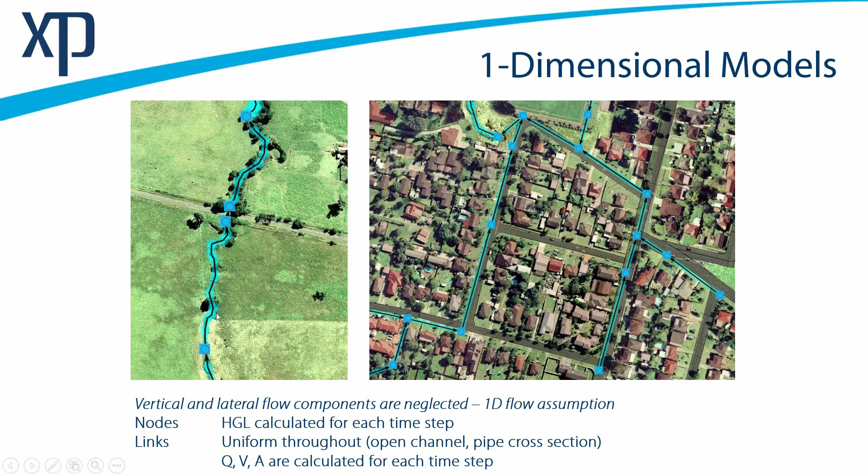And then we go and solve the equations, the continuity equations and momentum equations. And what we end up getting is a grade line at the nodes, and then we get flows, velocity, and flow area through each of the links. What are the advantages of one-dimensional modeling? They're relatively easy to build. You can model large areas, and they require low computational effort compared to 2D models. Their theory is less complicated than two-dimensional modeling. They've been around for a long time, so they're well accepted within the engineering community.

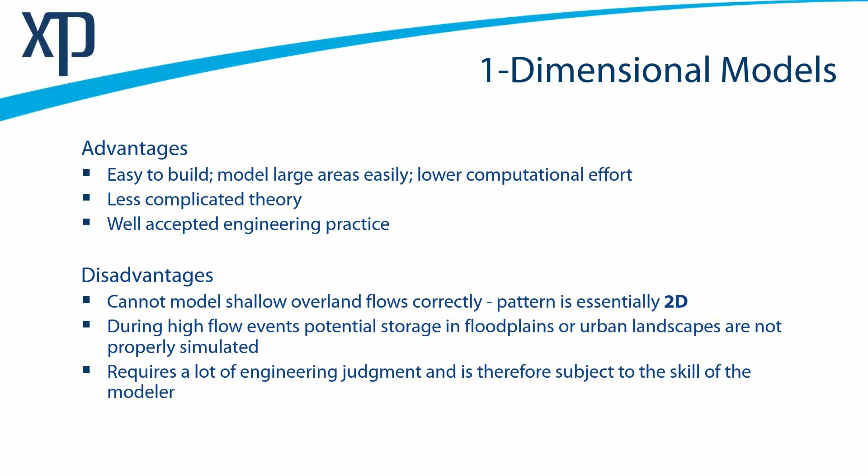The biggest disadvantage is the assumption that you can only have one-dimensional flow. Oftentimes, you have situations where flow is, let's say, overtopping the channel bank, or you have a storm drain pipeline which is surcharged, and you have overflows coming into the urban area. That cannot be properly represented within a one-dimensional model because those are essentially two-dimensional flows. So within a 1D model, if you want to get an estimate of 2D flows, you need to be aware ahead of time where flows can occur, and you need to cut cross-sections so that you can, in some ways, interpolate from the results what 2D flow regimes occur.

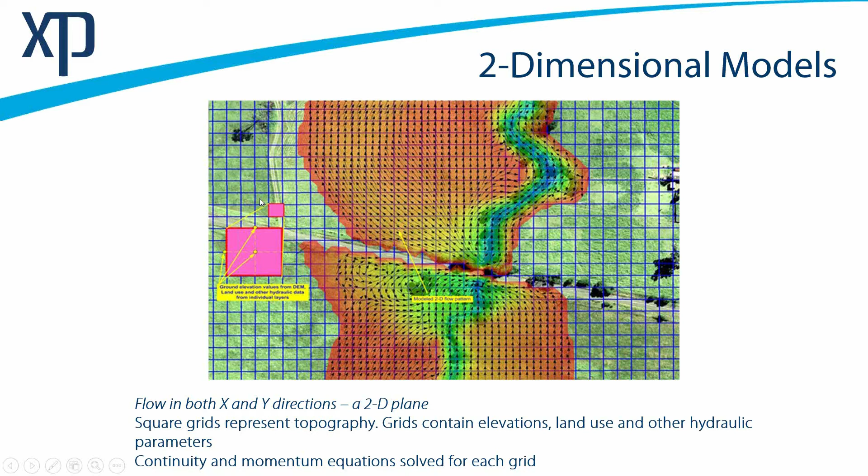So we can switch over to the other type of modeling, the two-dimensional model. In XP, we use the concept of grids, and two-dimensional modeling uses a set of uniform grids. The grids contain the information on the topography, so we have elevation information. In addition, they contain the hydraulic parameters, so we have the land use data, roughness, and any other hydraulic parameters needed to compute the two-dimensional flow. The momentum and continuity equations are solved at the grids. And what we end up getting is the water surface level at each grid, at each time point, and the flow going from each grid to adjacent grids. The advantages of two-dimensional modeling: it's relatively easy to build a model of 2D flows.

The main thing that we need is a good topo map, a surface map. A lot of the things that we want to look at when we are looking at two-dimensional flows, so flow storage effects and inundation maps, those are created directly from the two-dimensional model. Whereas in a 1D model, you only get the water surface elevation at a cross section, and you need to extrapolate to figure out what's happening for storage effects and inundation. These are done automatically in the two-dimensional models. So in some ways, you can say there's less engineering judgment required using 2D models.

But there are some disadvantages to using a 2D model. You need good, precise, and dense survey data. The quality of your survey data, basically your topo information, will dictate how accurate your two-dimensional flow results are. It requires more computational power and time than is required for a one-dimensional model. And then there are two other things that we need to look at. It becomes relatively difficult to model very large areas with a small cell size. And there's also a trade-off in the accuracy and the representation of the cell size. I'll get more to these 2 points in my next slide.

And 2D modeling is a relatively new approach. It's maybe been around the last 15, 20 years in the engineering community. So it is not as well accepted as 1D modeling. It's still, you can say, in the phase of development and being accepted by the community.

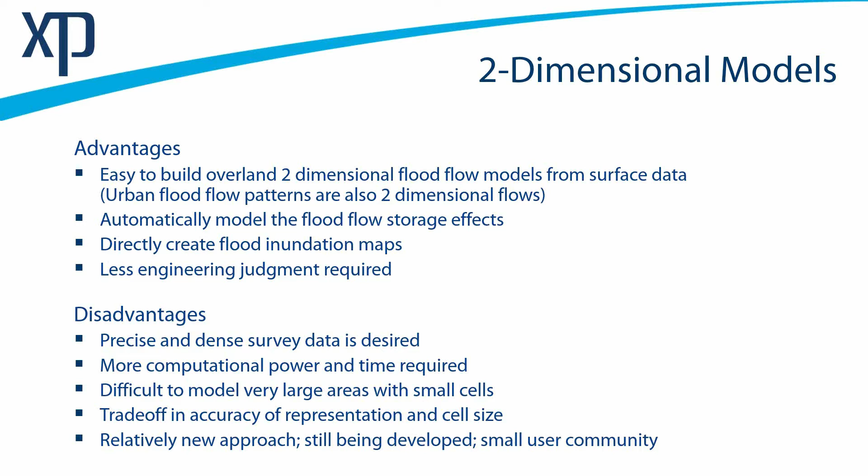So what can we do in such situations? One thing is maybe go and use a smaller grid size. The only issue is the smaller the grid size, the more the computational requirements are. So there's a big trade-off between the cell size itself and the computational requirements. Let's say if you use a grid size half of this size, the computational power goes up 8-fold. So that is one big issue in 2D modeling.

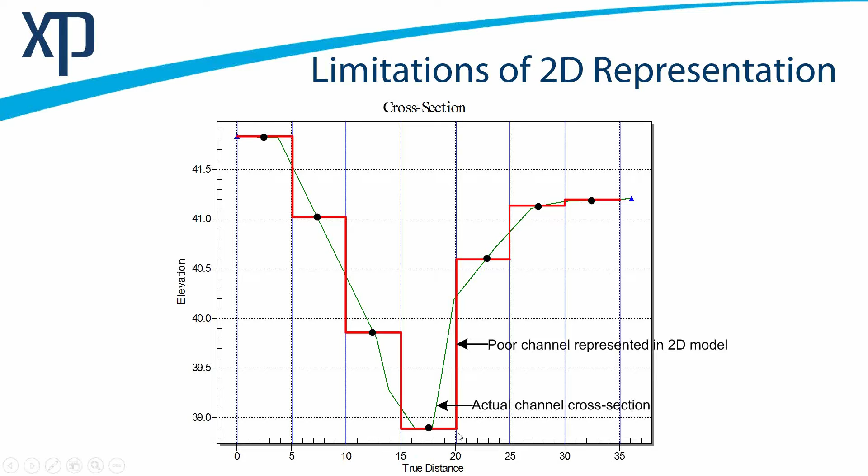So there's a whole concept. We know 1D models are good for certain applications, and 2D models are better for other applications. So if you're looking at situations where we have a combination of one-dimensional and two-dimensional flows, it makes sense to couple the models together and use each approach for the modeling it is best suited for. So we can use a 1D model to model any underground pipe flows, so storm drain systems and sewers and culverts, and any channel flow.

And then anytime we have flows overtopping the banks of the channel and going to the floodplain, use a 2D model for that particular domain. And the same thing, if the flows from the buried pipeline are reaching the surface and you have some street flooding, model that in 2D. And if you have wide watercourses, then you can model those in 2D.

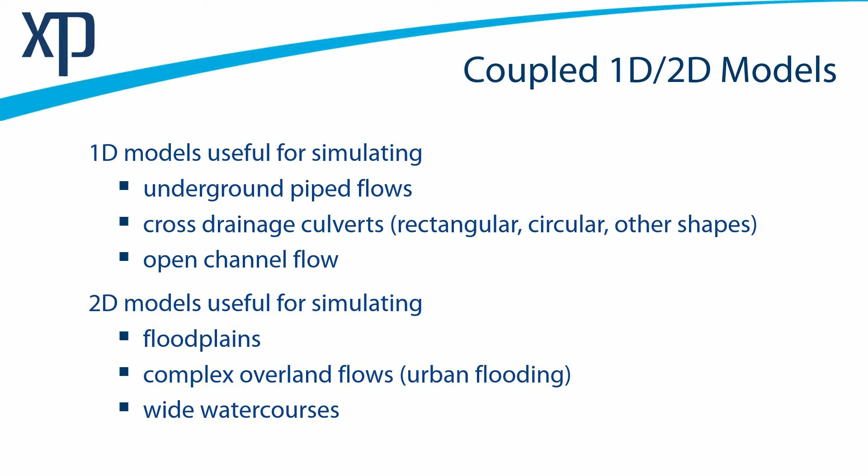Before I go on to the next slide, I think now is a good stopping point, and we'll do a quick survey to get a feel from the audience on what sort of applications they do 2D modeling for. I'll ask Nicole to take over and do the poll. Absolutely. So you can see on your screen now: what are typical applications for which you currently use or plan to use 2D modeling? The options are floodplains, urban areas, so if you have a lot of underground systems that you have to deal with, maybe coastal areas, wetlands, or dam break.

All right, I'll go ahead and close that. Can you see that, Venu? Yeah, I can see that.

So the results are basically saying 90% of the audience is using 2D modeling to look at floodplains. 80% is looking at urban areas. And then we have 30% looking at dam breaks, 20% at wetlands, and 10% at coastal areas. It works out pretty well because I'll be focusing on the two areas most of the audience is interested in. So looking at floodplains and urban areas, and how we can combine 1D and 2D modeling in both of those application areas.

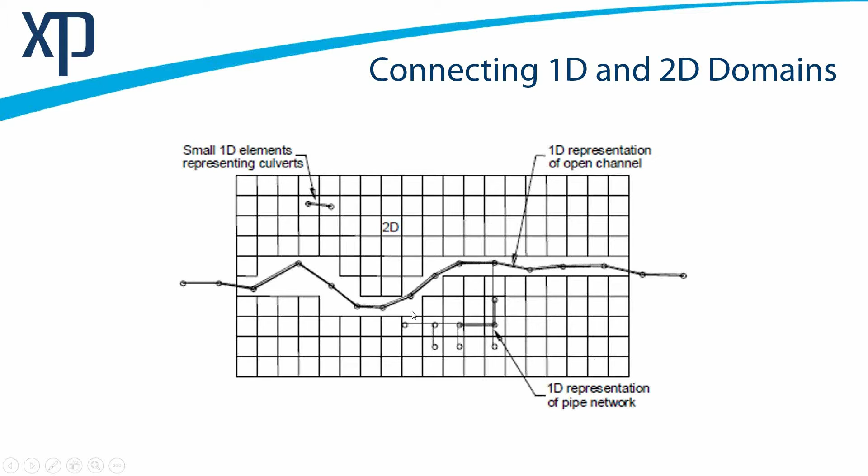For example, within a small area, we can model a culvert. So this is an isolated area itself. And then we can call this a channel or a river bed running through it. And then we do have a storm drain system. Each one is an independent 1D model embedded within the larger 2D model, and those can be connected.

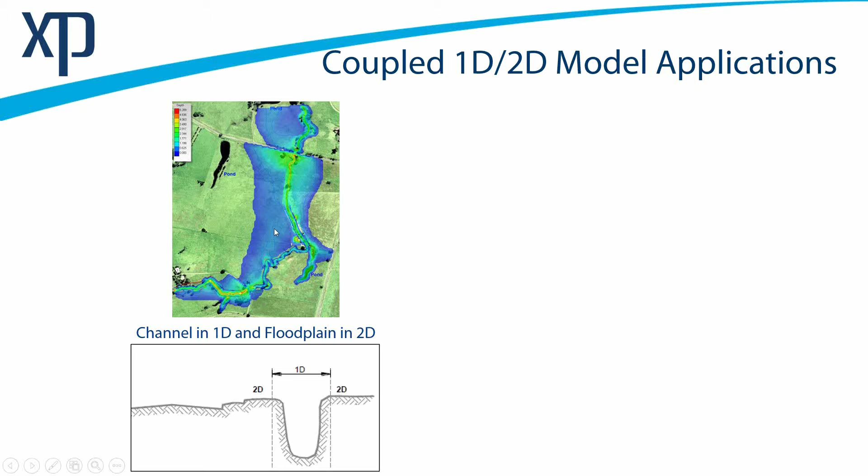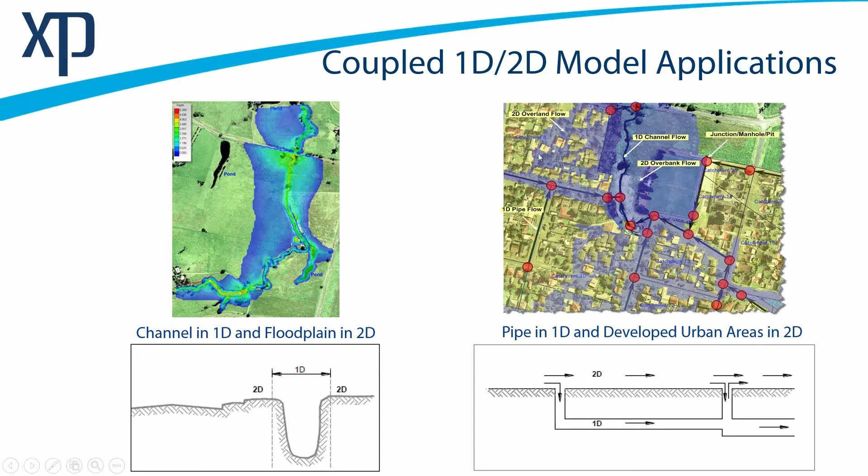If we start looking at urban applications, what we have here is a storm drain system within an urban area. As long as the flows are within the pipe itself, we can use 1D modeling. That's the most suited. So anytime the flows are within the pipe system, it's 1D. Once you start getting flows to the surface, we switch over to the 2D modeling. So surface flows will be modeled in 2D.

So I'll go ahead and jump into setup and best practices for 1D/2D modeling. 1D/2D models are fairly complex. So it's highly recommended that we develop the 1D component of the model first. It's easier to build, it's easier to debug, and once we have a working model, then we can combine both of them together. If we start working on both the 1D and 2D models simultaneously, it becomes somewhat hard to figure out where the errors are, what the boundary conditions are, what's missing. So develop the 1D model, get that working, and then combine that with the 2D model.

The next thing we need is a clear understanding of which components we want to be modeled in 1D. Where is the flow regime acting more as a 1D flow and where is it acting as a 2D flow? So within the study area, what is best suited for 1D modeling? What is best suited for 2D models? What are the linkages? Where is flow switching over from, let's say, one-dimensional flow to two-dimensional flow?

A couple of things to keep in mind. Let's say we are modeling a channel. If the channel is being modeled as 1D, we want to make sure that the extent of the channel is removed from the 2D surface. We don't want to duplicate the conveyance area and storage areas. Another example might be modeling a pond as a 1D node. We need to make sure that the footprint of the pond is removed from the 2D model. Once again, we don't want to be double counting the storage area within the pond.

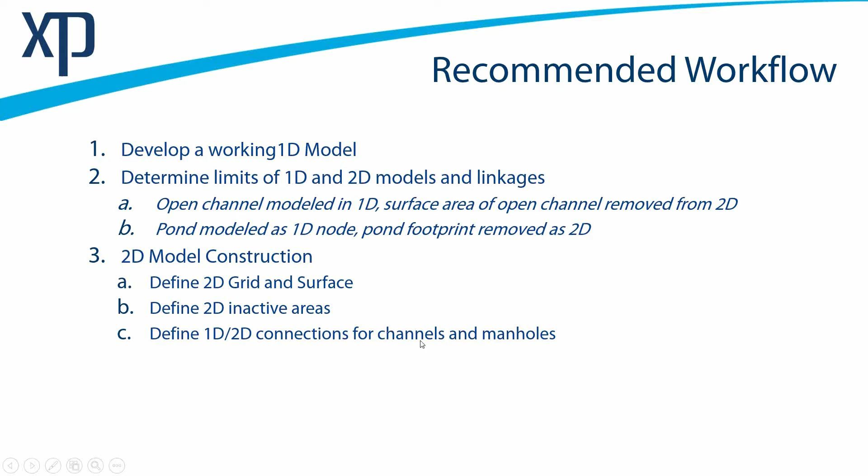And then in an urban application, when we have a storm drain system, how can we connect a manhole to a 2D system? The next thing is, this is for the 2D grids itself. We need to define the land use. In land use, primarily what we are looking at is the friction factor and any other hydraulic parameters which will define the flow equations. Define the boundary conditions for the model. Go ahead and set the job control, and then the model is ready to go.

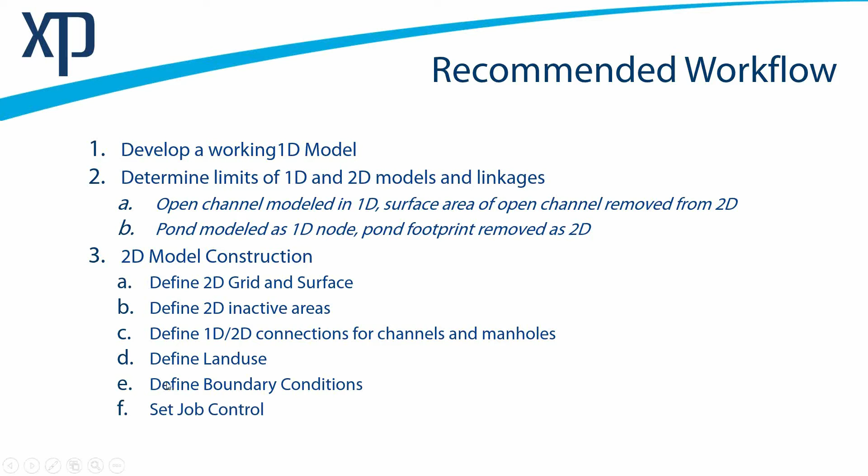So I'll be looking at two applications, and the first application is looking at how you can connect a channel defined in 1D to a 1D 2D model. There's a lot of information on the screen, and I'll just walk through them one by one. So we have modeled a river in 1D. So what we have is basically the node, then one river reach, which is shown by this link over here, and then the downstream node.

We'll be modeling flows within the river channel in 1D, and any time the flow exceeds the top of bank, then that's going to go into the 2D model. So the first thing we want to do is clearly distinguish where the flow elements are going to be within the 1D model and where they are going to be within the 2D model. In this particular area, we know where the top of bank is. So the top of bank will serve to delineate two areas. One is going to be what is inactive within the 2D areas.

So everything within the top of bank is going to be channel flow within these limits. Once you exceed the bank level, then that's going to be 2D flow. So this will delineate where the flows are switching from 1D to 2D. This becomes an inactive area in that we don't model that within the 2D, and it's also the interface between the 1D model and the 2D model.

The second thing is the 1D model is going to calculate the grade lines at the nodes themselves. That information needs to be conveyed over to the 2D model. We use the concept of a 1D 2D connection line to pass the information from the node, which is calculated in the one-dimensional model, to the two-dimensional model. So at each time step, any head which is calculated in the node will be transferred over to this.

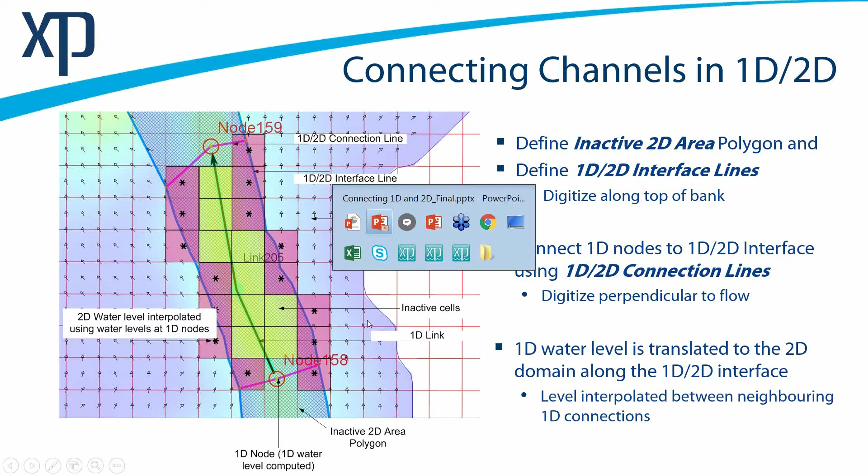So I'm within XPSWMM, and I've already built the model for the river channel itself, and it's a 1D model. So we have node and link representations. I'm looking at node 1, node 2, node 3. The river is coming in and we're crossing a road embankment, so we have a culvert running underneath the road itself. For the river itself, I defined the cross section, and that's shown by this blue line. So this is essentially a 1D model.

I'll go and turn on the grids. This 1D model is sitting on a 2D model. So this area is being modeled within the 1D model, and we don't want to duplicate that in the 2D model. So the first thing is we make this area which is being modeled in the 1D model inactive within the 2D model. To do that, we go to this icon, the 2D model.

We'll be creating a new layer, and that's going to be an inactive area within the two-dimensional model. Go ahead and give it an appropriate name; I'll just call it inactive. The inactive area is a polygon type, so we'll go to the right-hand side and click on this icon, which is create a polygon. We have a fairly good topo which shows us where the top of bank is, so we'll be delineating the polygon along the top of bank itself.

I'll just go ahead and click on it, and then I can just follow this. In the ideal situation, we would pay proper attention and delineate it as accurately as possible. For the sake of time, I'll just do a rough approximation. A couple of things to keep in mind when you're delineating the polygon: try and keep the channel fairly constant for its length, so the width has to be fairly constant for the whole length. So I'll delineate one side, and then I'll jump over to the other side and delineate the other side along the top of the bank.

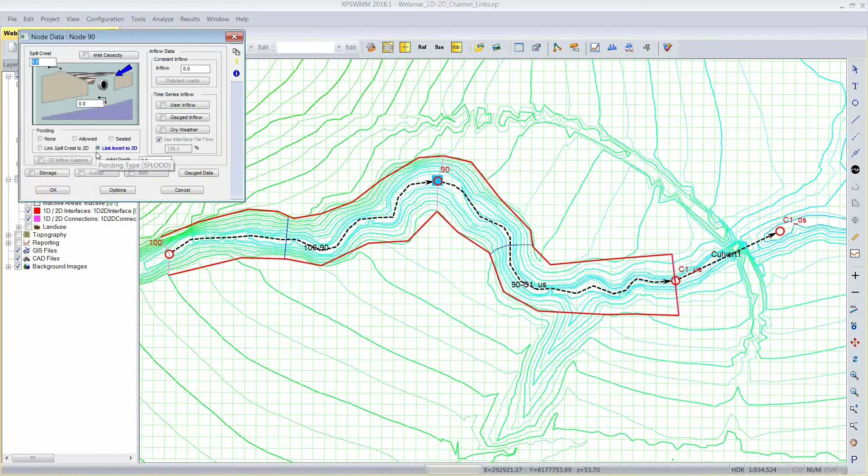So those are the 4 essential steps that need to be done to link your 1D channel to a 2D domain. The next thing that I want to look at is how do you connect manholes? Let's say you have a buried pipe system and you want to connect the manholes in 1D to 2D. This is a much simpler process than connecting channels in 1D to 2D. All you will have to do is go and edit the manholes.

Within that, there's an option where you can link the spill crest to 2D. So go ahead and make sure that option is selected. The second thing that you want to choose is this option, 2D inflow capture. Go ahead and make sure that option is also selected. As soon as you do that, it gives you this equation.

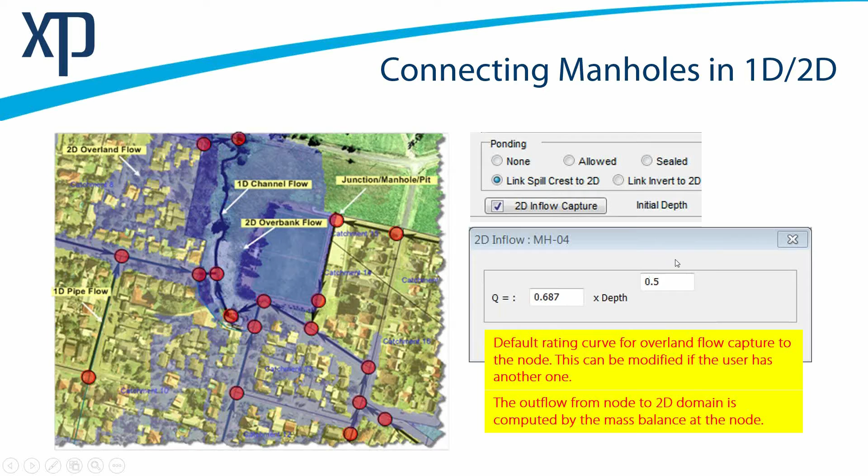What this option does is it lets you choose how flows from the 2D surface can enter the manhole itself. So you can go ahead and give an equation: the unit flow per area based on the depth you have within the 2D cell raised to a certain power. This is the default equation, but you can change it to whatever is most applicable for your particular situation. I'll go ahead and show how this is done within the model.

So I'm looking at a model, and let me highlight all the nodes. Basically, it's a 1D, 2D model. We have a storm drain system, and it's connected to a 2D grid over here. Go ahead and click on a certain manhole. We can just do edit data.

So to have this manhole connected to the 2D cell, all we do is, it's already selected, link the spill crest to 2D. And then the second option, where we define how flows from the 2D surface are entering the spill crest or the rim, is to click the 2D inflow capture. It gives you the option, and then you can define the equation for inflow into the manhole.

So some of the common errors that we often run into when we are linking 1D and 2D models, and how we can troubleshoot them. What are the things that we need to watch out for when we are modeling culverts? Assume that we have modeled the culvert as a 1D element and the remaining portions of the model are in 2D. Flow through the culvert is defined based on the water surface elevation at either end. The model uses the water surface elevation in the cells on the upstream and downstream ends to determine the gradient, and that determines how much flow goes through the culvert.

So in a sense, the 1D element acts as a sink and then a source, driven by the gradient. You'll be getting flows coming from one 2D cell going to the other 2D cell. So the main thing to watch out for is that you have 2D cells defined at a certain size. What is the size of the culvert you're trying to model in relation to the size of the 2D cell? If the culvert is smaller than a typical 2D cell, you can assume you can just have one point on either side, so flows come from one 2D cell and discharge to another 2D cell.

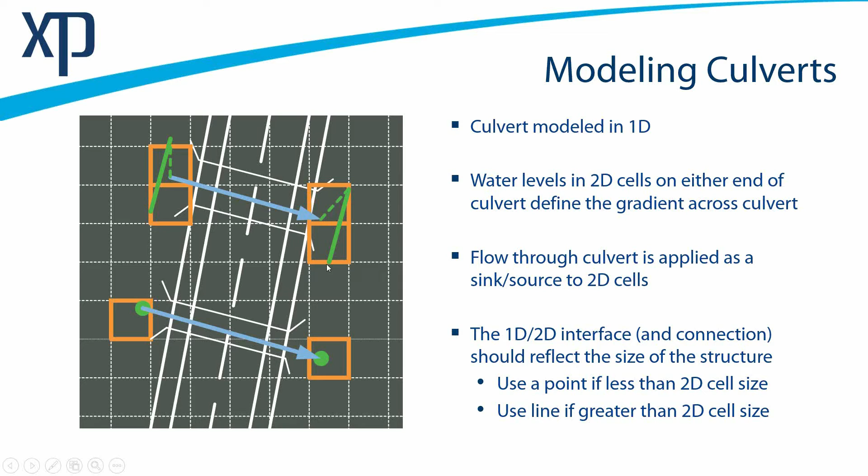Let's say you have a relatively small grid cell size and the culvert is multiple times the grid cell size. Then you want to make sure that you're getting flows from multiple grid cells and transferring them to multiple grid cells. I'll switch over to the model and see how this can be modeled within XP.

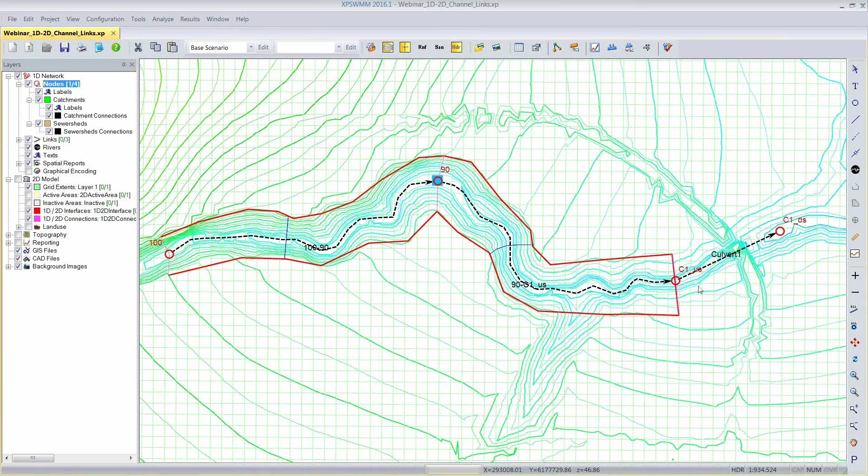I'll go back to the same example model that I was looking at before. This is where I have the modeled culvert, and I'll move over to the downstream portion of the culvert. I'm using 5 meter square grid cell sizes. So if this culvert is 5 meters or less, the way we have it modeled right now is accurate, and we're discharging to a single cell. Now, let's say this is a 10 meter culvert; we don't want it discharging to a single cell, we want it discharging to multiple cells.

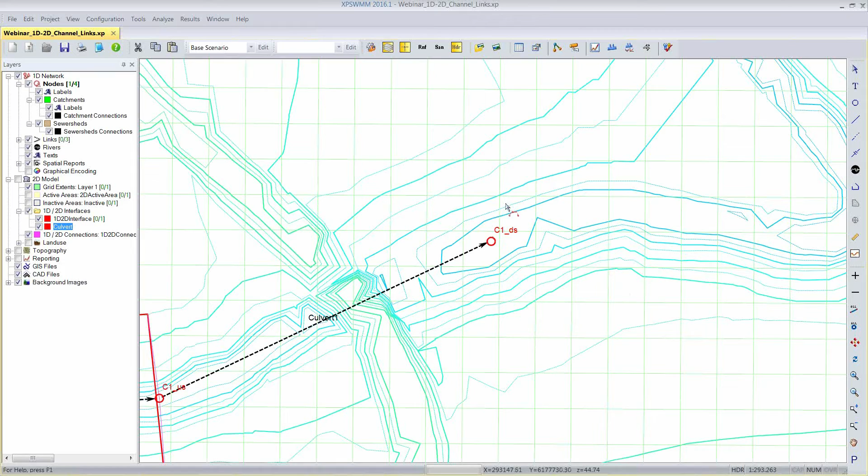So what we will do is go back to the 2D model. We'll add a new layer, a 1D, 2D interface. I'll call it culvert for this example. Select that 1D, 2D interface, and it's a polyline. Assume that the flows coming out of this are going to be discharged to these two cells in the 2D domain. Go ahead and draw an interface line which covers both of those.

Double click on them. The next thing we want to do is connect our 1D model to this 2D interface line, so any flows coming through this 1D link will be spread among these two cells, discharging to both cells. So we need to connect the 1D element to the 2D interface. Go ahead and right click over here, adding a new layer. This is once again a 1D, 2D connection. I'll just call that culvert.

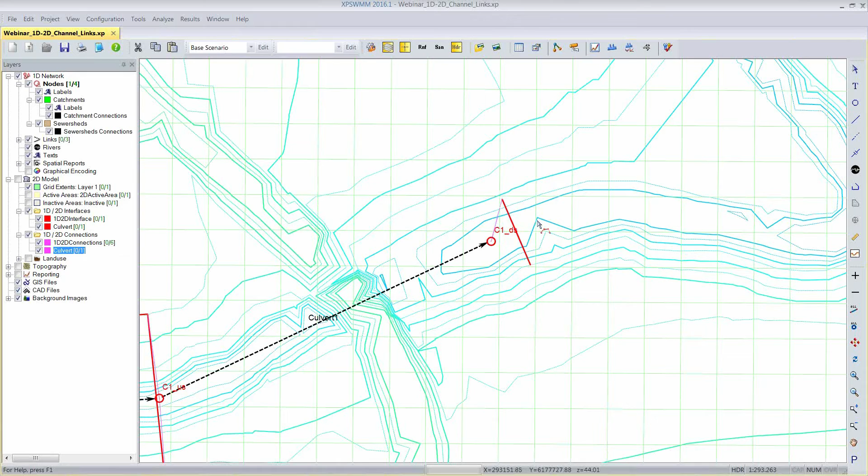Go ahead and select that, and that's a polyline type. Select on the polyline. So you can just click on the manhole itself, and then you can click to any one end of the 1D/2D interface that we created for the culvert. So we're done with culverts.

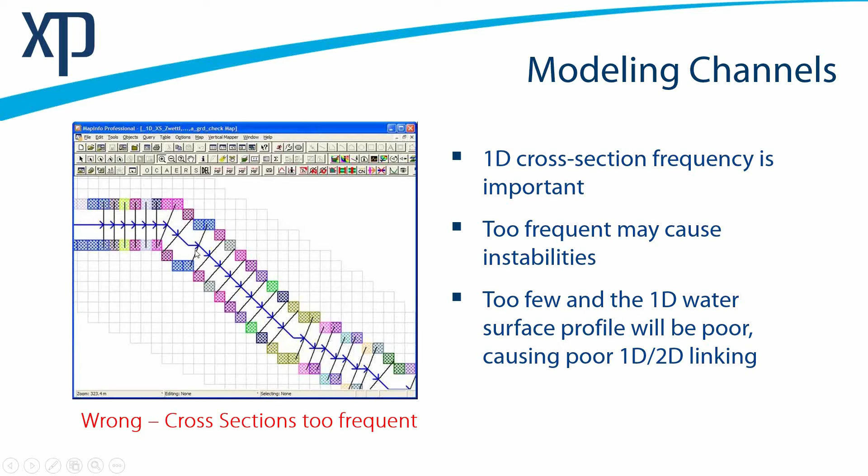And another thing, when we are modeling our channels in 1D, one thing that we need to watch out for is the frequency of cross sections. In this particular example, we have cross sections which have been shown in the 1D model, and we have them too frequently. The problem we have is when you have cross sections very frequent and then connected to a 2D model, it can often lead to model instabilities.

So as a rule of thumb, it's recommended that when you're coupling a 1D model to a 2D model, you use a spacing of maybe a cross section every 5 to 20 cells. On the flip side, you don't want to have the cross sections spaced too far apart. If they are too far apart, then you won't be getting a proper linkage between the 1D and the 2D models, and there won't be a good representation of how the head is changing between the 1D and the 2D models.

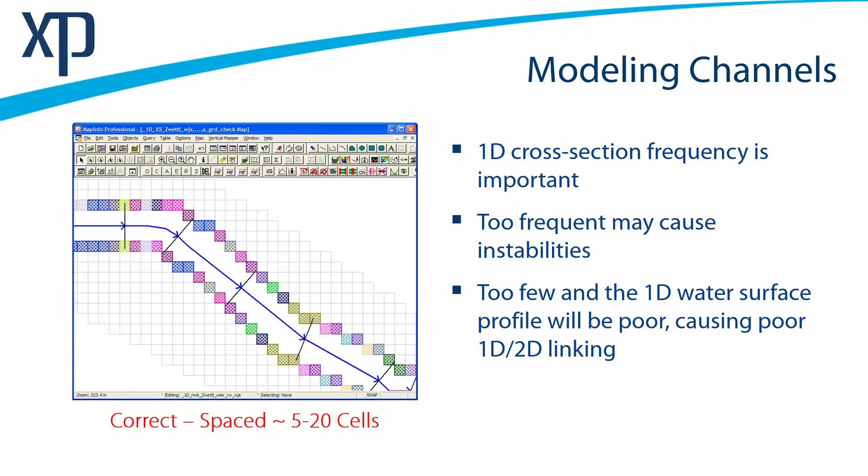Next thing that we want to look at is we have a model which has been defined in 1D. And one thing that we need to remember is when we define a 1D model, we are defining head at both locations. We have a node at the upstream location and a node at the downstream location. Then we are defining a link, and in the link we have a channel cross section. So in this particular example, we defined a spill crest for the manhole.

If the spill crest for the manhole is defined at too low of an elevation, what's going to happen is anytime we're under a condition where we have 2D flooding, if the 2D flooding level is much higher than what we define as the spill crest, we'll be getting flows from the 2D flood over here. But the way XP works is within the 1D domain, once you start getting flows over the spill crest, either that will go into storage or the system is going to start acting as a pressurized condition. So we'll be inaccurately representing what's happening under a flooding condition.

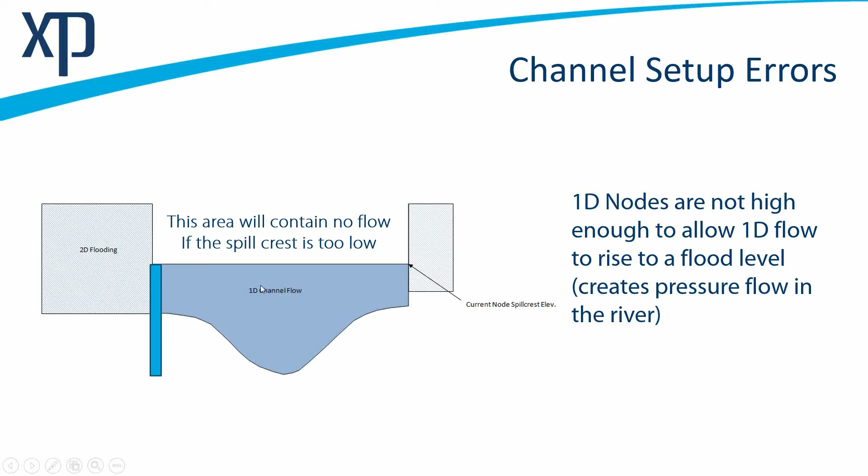So how do you go about fixing this? Before modeling, it's good to have an understanding of the highest expected flow levels within the 2D model itself. Go ahead and define the rim or the spill crest for your manhole such that it will always be above the maximum level that you can expect the 2D flooding to occur at.

And the next thing that you want to do is turn on the concept of vertical walls. When you're defining your channel, it's just going to go from top of bank to top of bank. If you use the concept of vertical walls, it defines a vertical wall starting from both edges of the banks, and all one-dimensional flows will be retained within this surface as long as you are within the spill crest elevation. So we end up confining the 1D flows to over here, and then anything overtopping will be in 2D flows.

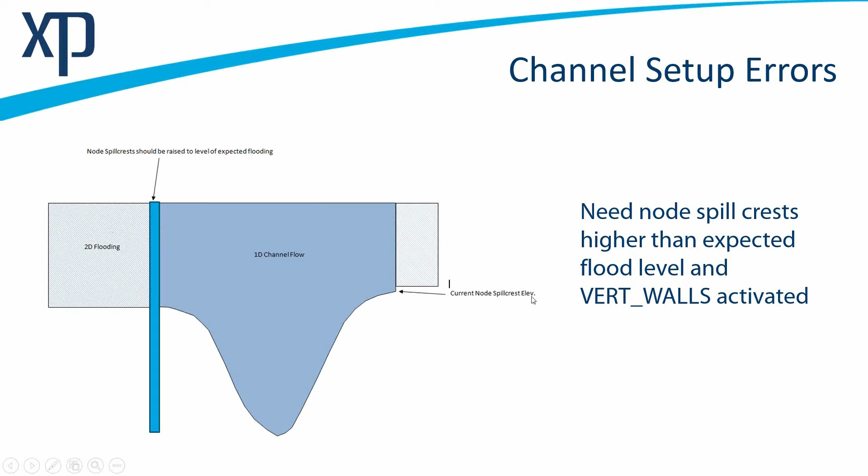To turn on the vertical walls, that is a feature which we have within the configuration parameters. So we'll go to configuration parameters, and then we use this special parameter, vertical walls.

Another thing that we need to notice when we are looking at 1D/2D models is, you have the cross section which has been defined within the 1D/2D model, and then we have the 2D domain. The 2D domain is going to use a topo, and it's going to get a cell surface elevation. Oftentimes you might end up with a discontinuity in the elevation between the top of bank and the cell elevation itself.

In this particular example, if you're looking at the channel itself, we have the top of channel elevation in the 1D model. It's 176 on one side and 175.8 on the other side. And then if you look at the 2D cell elevation, it's only 174.31 on this side and 174.5.

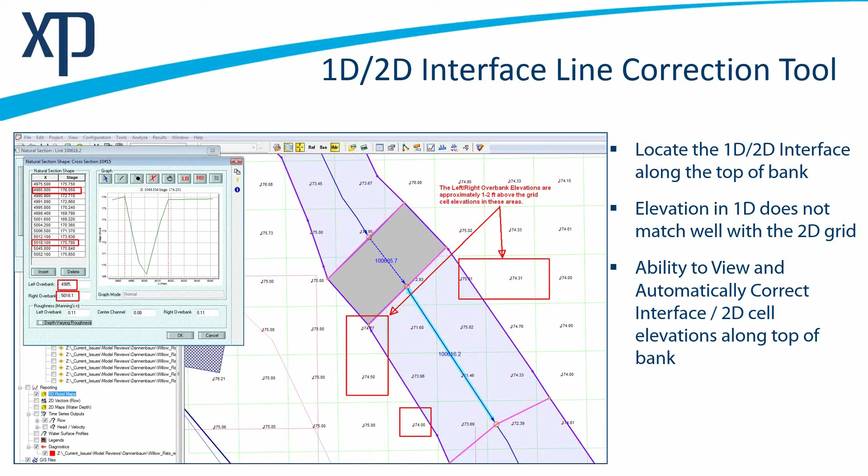So there's about a 1 to 2 feet drop between what's being modeled in 1D versus what's being modeled in 2D. This is bound to happen based on the grid cell sizing you have. So we do have a tool within XP software which can help you detect this issue and also fix it. So how do we go about using that feature?

So once again, it's a similar example to the one which I had worked on before. We are looking at a channel over here. The channel is modeled in 1D, and then we have a 1D 2D interface, and it's connected to a 2D model. So that's the extent for the 2D model. I'll go and turn that off. If we select the 1D 2D interface and then right click, you can go ahead and display a profile for the 1D 2D interface.

This window pops up, and it shows you a profile of the 1D 2D interface. So there are a couple of pieces of information in here. Shown in green is the interpolated bank elevation. This is based on what has been used for the 1D model itself. You have defined nodes, you define the cross-section, and you get some elevation, so you have bank elevation. Shown in red is the grid elevations. This is the information which is being used by the 2D model itself.

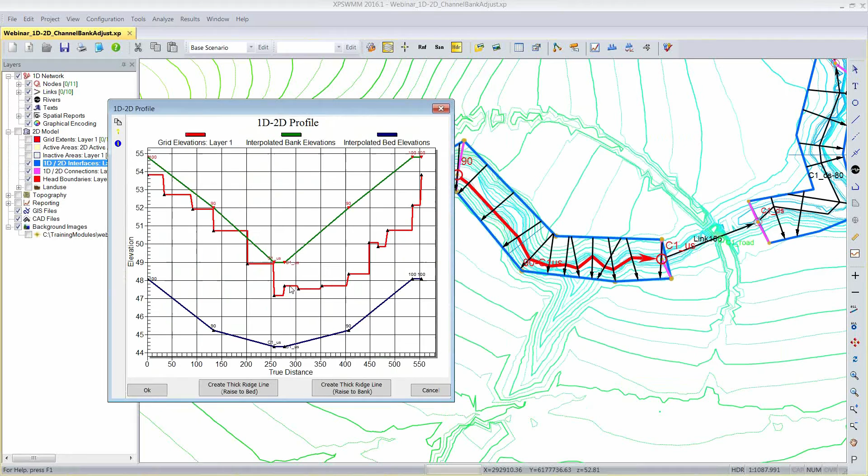So along this length of the bank, the 2D model is fairly closely matching what we have within the 1D model. Once we come to this side of the bank, we see that the grids in the 2D cells are much lower than what we have within the 1D model. So we do have a feature where you can automatically correct that. You will create a thick ridge line. This creates a ridge line which will automatically raise the 2D cell elevations so that they more closely match the bank elevation defined in the 1D model.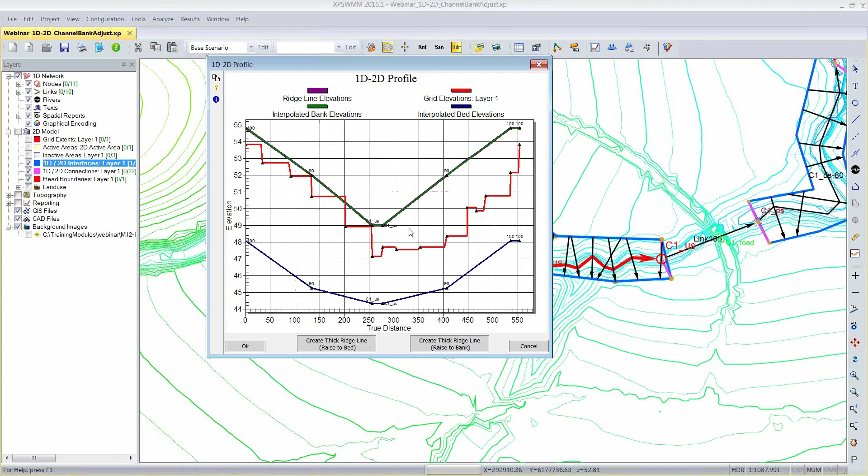All you have to do is click on this option, create a thick ridge line. It's going to raise the 2D surface bank to the bank itself. I clicked on it and the process has been done. The new bank which has been raised is right underneath the existing bank elevation, so it doesn't show up. Let me go to the graphical view and I'll show you where it's defined. Click on OK. This is the interface line itself. I'll turn that off for the time being and show my topo layers.

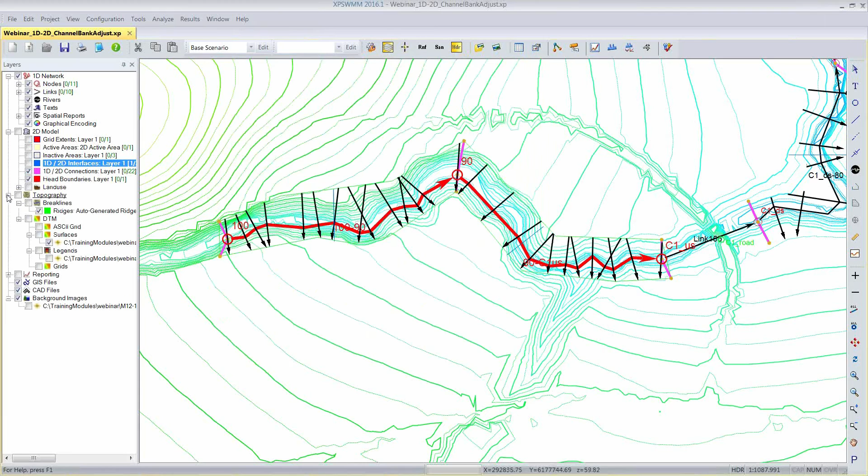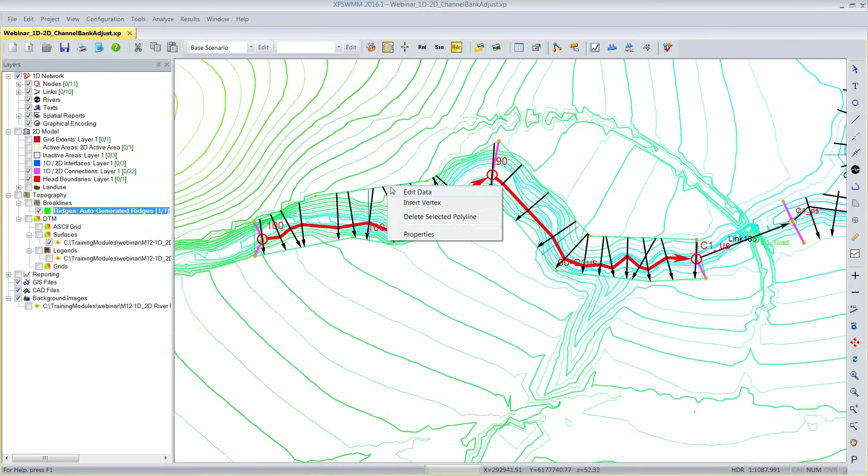Under the topo layers, by going through that process, we've generated a set of ridge lines. Select the ridge line, edit the ridge line. This was the original elevation information along the ridge line, which was being used by the 2D model. Based on the 1D model, this was what the top of bank elevations were. So we've adjusted it, and the ridge line has been put in so that instead of what was originally digitized, this is what is being used within the 2D model.

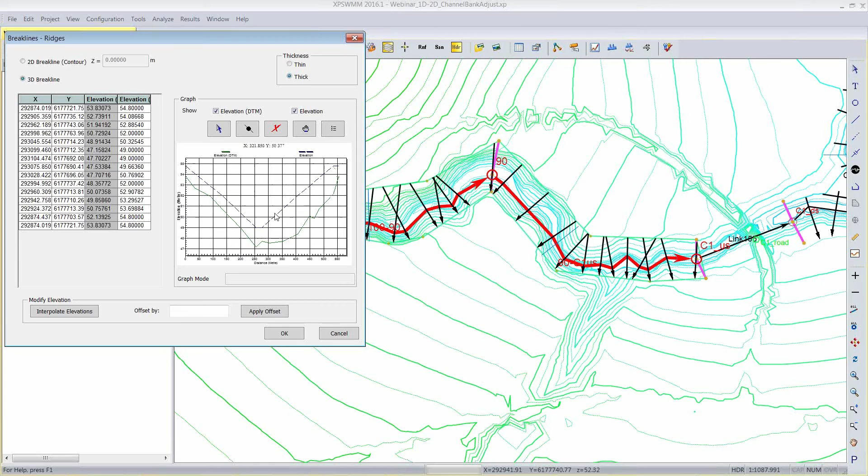So what this does is, for the grids along the interface line, those have been adjusted so that there's no sharp discontinuity between the topo surface that we have modeled within the 1D and the 2D model. They are more closely matching. So you're able to get a better flow moving from the 1D to the 2D model and less chance of model instability.

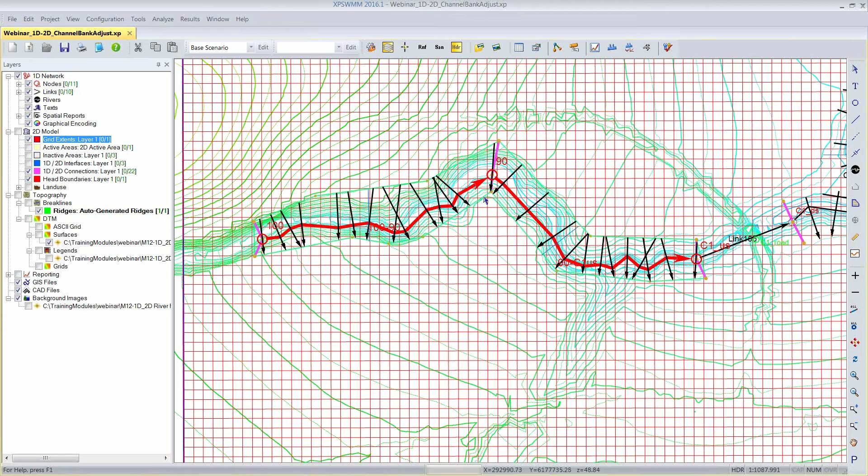Now, if you look at manholes, one of the errors we can have when connecting a manhole in 1D to a 2D model is the situation where the 2D surface is much higher than the rim or spill crest of the manhole. This can be fixed automatically within XPSWMM. We can go to 2D job controls, and there's a feature where it'll lower the 2D cell so that it matches the elevation of the rim itself.

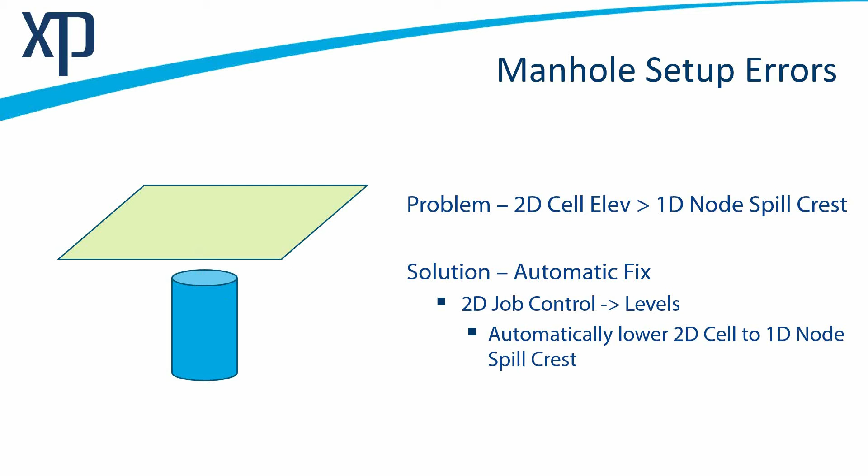We don't want this situation because there's a discontinuity, and any flows that enter this area will get lost and lead to model errors. So we have a feature built into the model to check for this condition and fix it. There's another condition which can also sometimes occur, where the top of the manhole, the rim, is higher than the 2D surface elevation.

What's going to happen is basically the manhole will act as a smokestack. Any water surface that you have within the 2D has to actually raise up to this length before it can go into the manhole itself. And the same thing, any flows coming out of the manhole will be dropping over onto the surface. This condition can potentially occur in real life, so we don't correct for it automatically.

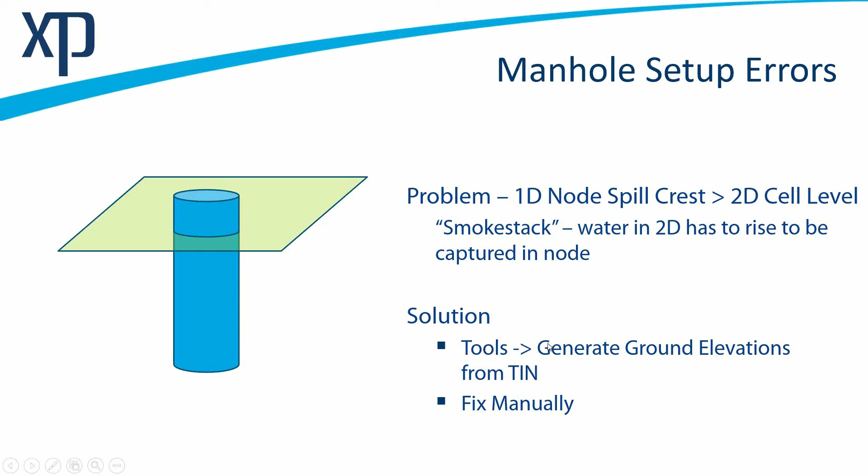But there are tools which you have within the software where you can go and look, and you can lower the manhole rims to the grade itself using this one tool, or you can just go in and fix it manually. I'll switch over to the model and show how these can be done.

So the very first condition that we were looking at, we can go to configuration, job control, 2D model settings. Under 2D model settings, we have this level condition over here. Go to level, and then we have this condition. If the 2D cell at a 1D node connection is above the node 1D spill crest, you can just click on this. So it'll automatically lower the 2D cell to match the spill crest elevation. So that is one option that you can choose.

The second option is you can just go to tools, and then generate the ground elevations from TIN. If you do this, no matter what elevations you have within the 1D model, it will readjust those elevations to match the TIN. So that's more likely to closely match what you have within the 2D model.

So we have the 1D, 2D models, and one thing we want to understand is how flows are being exchanged between the 1D and the 2D models. There are a couple of locations where this information is reported. The first thing is if you look within the 1D log, we have a table E19. It's a summary table of the inflows and outflows at each junction.

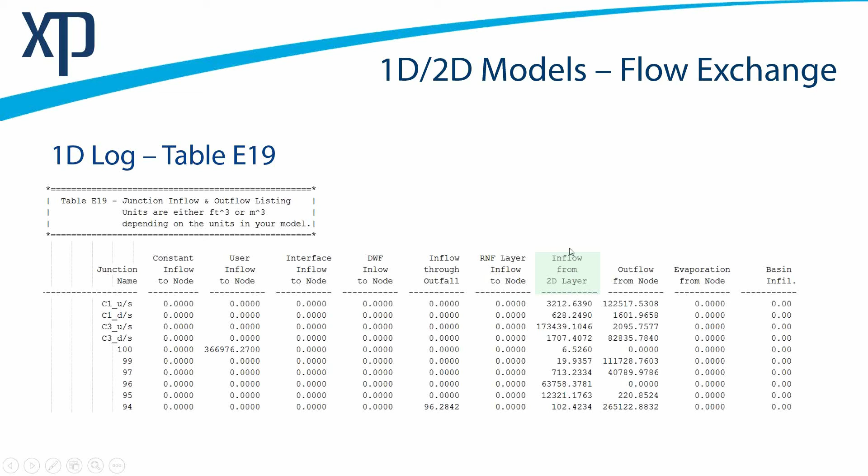So in table E19, information is categorized by junction, and then for each junction, we have the total inflow which is coming from the 2D layer. This is going to be for the total duration of the model simulation. And then if you go to table E20, we have the other information: how much flow is being sent from any particular junction to the 2D cell. Once again, this is summarized for the total duration of the simulation.

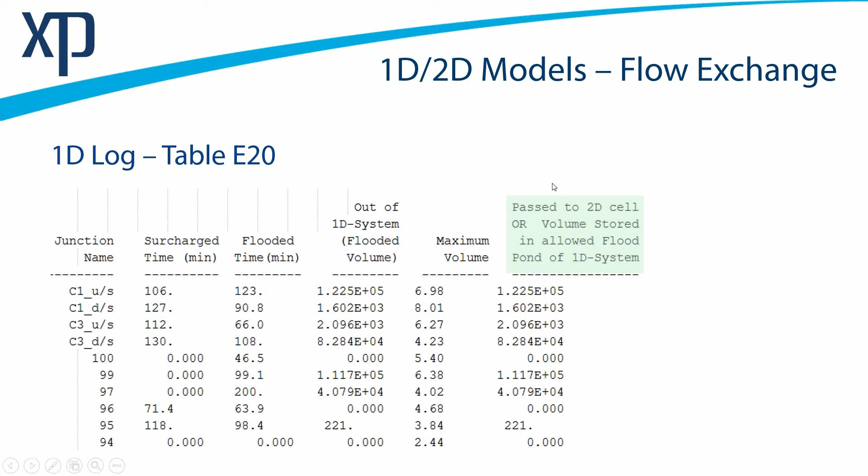The next thing is maybe we don't want the total information and we want actual hydrographs. That information can also be generated, and it's generated as a check file. So we would have to go to 2D job control. Within 2D job controls, you'll have to select this option, enable and produce check files. Once that is done, you go to the advanced settings, in this dialog box over here. In advanced settings, you'll click on insert and you'll get a new field. You need to key in this parameter, X1D check files, and then turn the parameter to on.

So what this does is basically it goes through the simulation itself and it creates two CSV files which generate hydrographs on the flows which are going from the node in the 1D model to the 2D domain, and also flows coming from the 2D domain back into the 1D model.

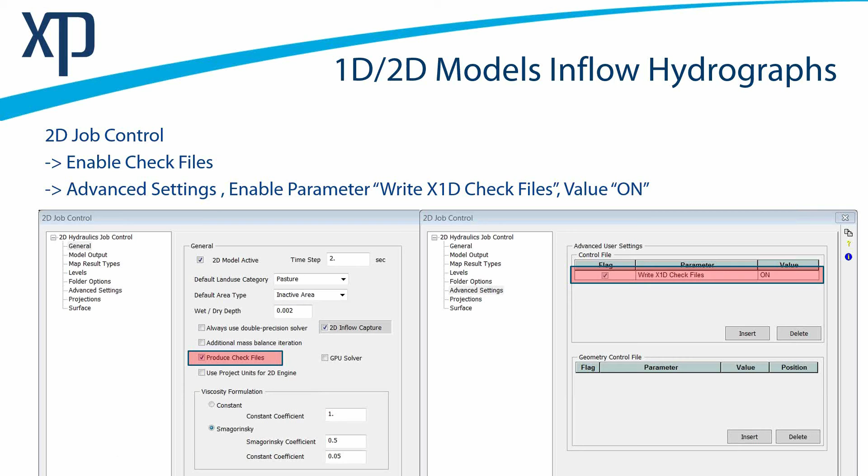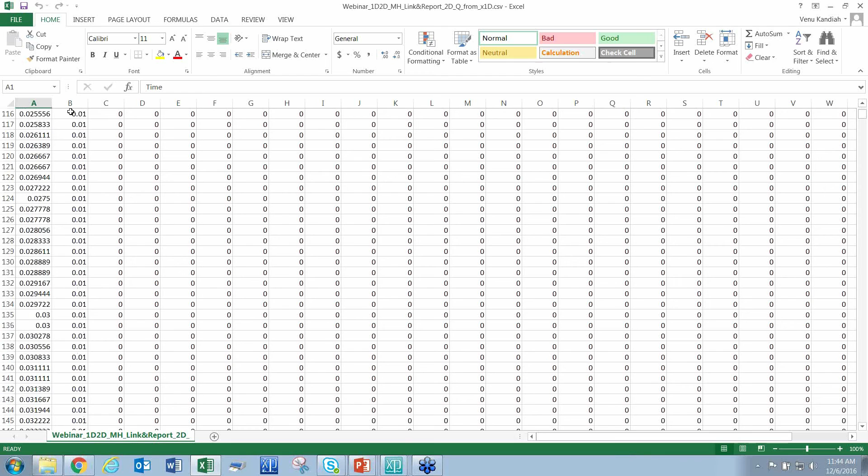The data which is generated is of this format. I had already run the model ahead of time, and here we're getting a report on flows which are coming from the 2D into the 1D model itself. It lists the different nodes which are connected to the 2D model. These are the simulation time steps, and if you scroll down, we basically get a hydrograph of how much flow is coming from the 2D model into the 1D. So we get two sets of hydrographs, flows from the 1D model to the 2D, and flows from the 2D back to the 1D.

So a summary of the information which I covered: coupling 1D, 2D models offers a good approach for modeling systems where we know we have a combination of both 1D and 2D flows. We can use the strengths of each approach, and it's computationally efficient. We can have multiple domains. It's spatially discrete, and we can look at it.

We need to have a good understanding before developing 1D, 2D models of which parts of the system are best represented in the 1D model, and which are represented in a 2D model. So understand where the system breaks up, what are the connections, and what are the linkages.

A couple of things we need to be aware of: as soon as you start doing a 2D model, you do start doing some discretization. So as far as elevations and hydraulic characteristics, as soon as you break information which is maybe continuous in nature into discrete, maybe certain grid sizes, how is it being changed? And you need to be aware of that.

For example, if you have a channel which is less than the grid cell size, the channel is going to be represented as a certain grid size. Is that going to give a good hydraulic representation? If not, maybe use that as a 1D, or maybe use a smaller grid cell size.

Then the next thing that we need to be aware of is the connections and the boundaries we have between the 1D and the 2D. Go ahead and run the model. Go ahead and double check those locations. Those locations are prone to maybe inaccuracies. Make sure that the flows are actually being transferred correctly, and what you have represented in the model is actually what you need. So those are locations where once the model has been built, go ahead and double check.

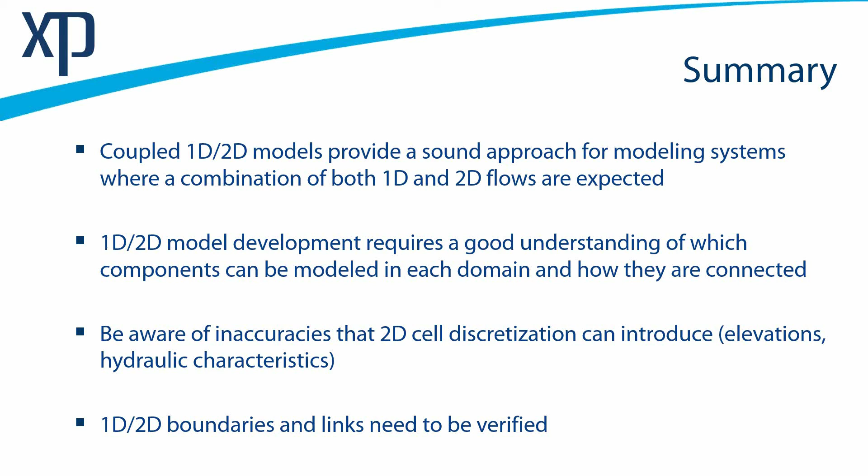A lot of times instabilities occur in the connections between the 1D and the 2D models due to the disconnect, maybe in the size of information that is being passed over, or the cell sizes mismatch.

One of the questions we had is, when modeling a channel, why do you select the option of linking the invert to 2D and not the spill to 2D? So basically what we want to have is, when you have the channel, the flow is going to start building up all the way from the invert itself and then going all the way to the rim. And the way you have the 2D surface defined, maybe the rim elevation in the 1D model might be somewhat lower, or there'll be a mismatch.

So you want to have the ability of the flows, not only when it exceeds the rim, being transferred to the 2D model when you're modeling a channel, whereas when you have a manhole, only when the flows overtop the rim are they being transferred to the 2D. So for a channel, best practice is basically you are connecting the invert elevation, and based on what you have defined for the 2D grid itself, until the hydraulic grade line exceeds the level in the 2D surface, you won't get water overtopping. But it's just a best practice when you're linking a channel to a 2D surface to go ahead and link the invert itself.

There was another question asking about flow balance, and I kind of touched on it at the very end. So you can go to the 1D output log, and tables E19 and E20 offer a summary. Another thing is you can go and create the check file, and that will create hydrographs at all the different locations, and then you can go node by node and get a good understanding of flows which are being conveyed from the 1D domain to the 2D domain. I think that about addresses most of the questions.